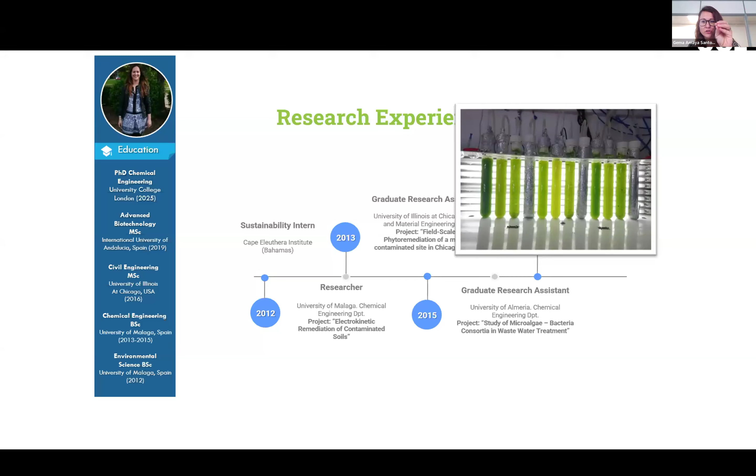All these different disciplines combined together led me to land on this amazing opportunity to do my PhD as a Marie Curie fellow in this project called Innoveox, that combined electrochemistry, wastewater treatment, sustainability, and life cycle assessment. Now I work as part of the Plastic Waste Innovation Hub.

The topic of my research has changed a little. It's still life cycle assessment, but now it's focused on plastic waste and how we can develop strategies from a systems perspective to reduce or make more sustainable the use of absorbent hygiene products: nappies, diapers, incontinence and period products. Those products are necessary, society needs them, but that doesn't mean they need to keep being a huge problem, a huge source of waste and a problem for the environment.

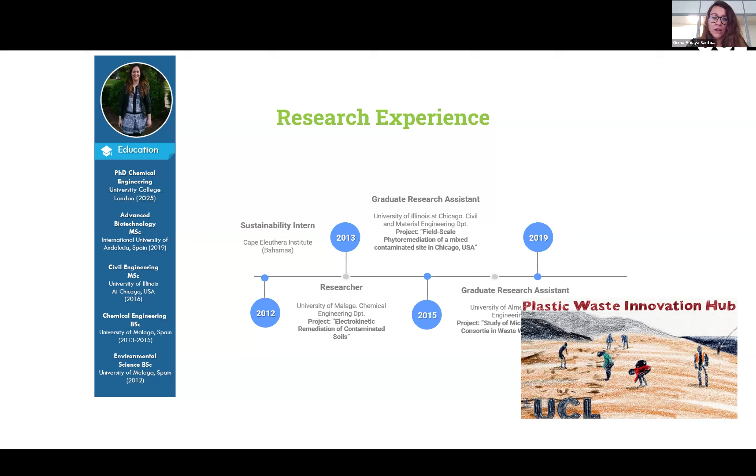So this is what we do now. I have divided this seminar into 4 sections following a logical order. Because of the time constraint and the broad audience, I'm not going to get into much detail in some aspects. So if you have questions, you're more than welcome to drop them in the chat or contact me later.

Be more than happy to answer if you have detailed questions about technical aspects. Basically, I'm going to talk about the background, why did I do what I did, a bit about the methodology. I will illustrate the study with some case studies that we ran through, and then we're going to talk about conclusions and next steps. So without further ado...

Not so long ago, European surface waters were found not to be at a very healthy status. They were okay, but they could do better, they weren't doing as good as expected. One of the main reasons for that was due to the presence of micropollutants.

For those of you who don't know what a micropollutant is, they are mostly organic compounds, many of them substances of concern and emerging organic pollutants that come from many different sources. They come from personal products like shampoo, body lotions and so on, medicines. They can be produced in different industries, coming from hospitals and so on. There is a very wide range of products that fall within this category.

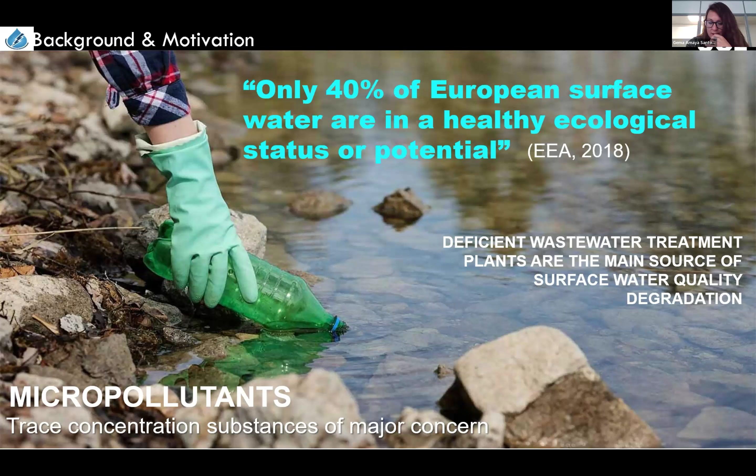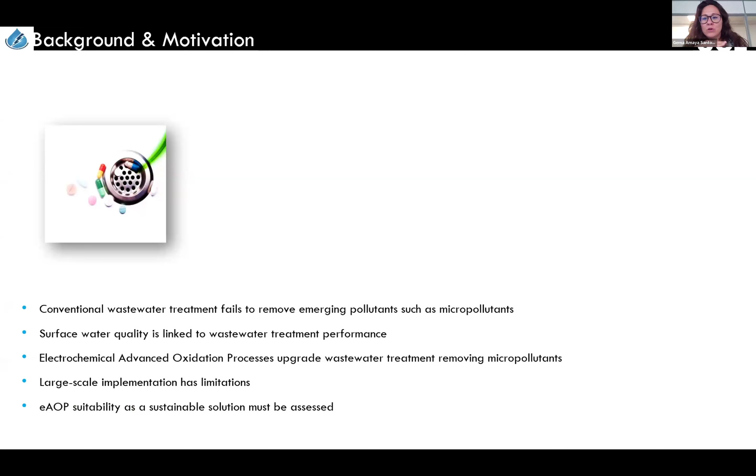If there was something to put the lens on, it would be conventional wastewater treatment plants, and I'll explain why. Basically, many contaminants end up in drains into the common wastewater stream towards the treatment plants. Conventional wastewater treatment plants often fail to treat them, so they end up in surface waters, causing damage to the environment and ultimately to human health.

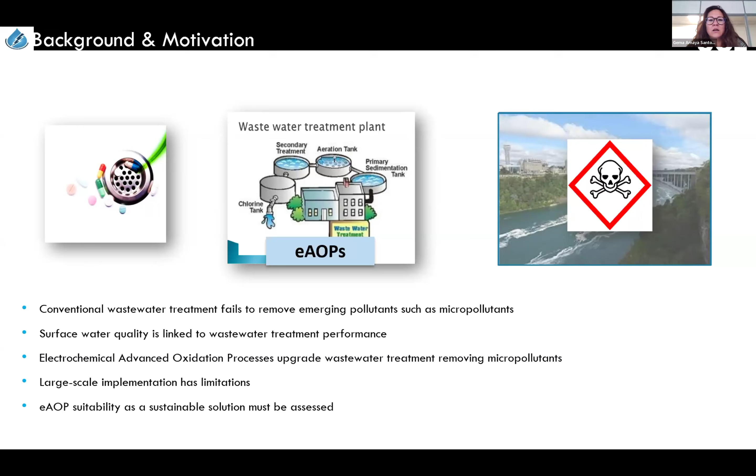So electrochemical advanced oxidation processes, or EAOP, were sought as a way to upgrade wastewater treatment and get rid, up to some point, of these chemicals. It's seen as a technology efficient to break them down and treat them through wastewater treatment. The problem is that large-scale implementation presents limitations because they are still at an early stage of deployment, so their sustainability and feasibility as a solution needs to be assessed.

For those who don't know what advanced oxidation processes or electrochemical advanced oxidation processes are, I'll explain quickly. Basically, they are a process able to break down organic molecules. How? It's a chemical process that produces highly reactive species with the ability to oxidize those organic molecules. The typical and most preferred reactive species is the hydroxyl radical, because it's very powerful. It destroys non-selectively - as long as it's organic or organometallic, it's done - and it reacts very quickly, creating a chain.

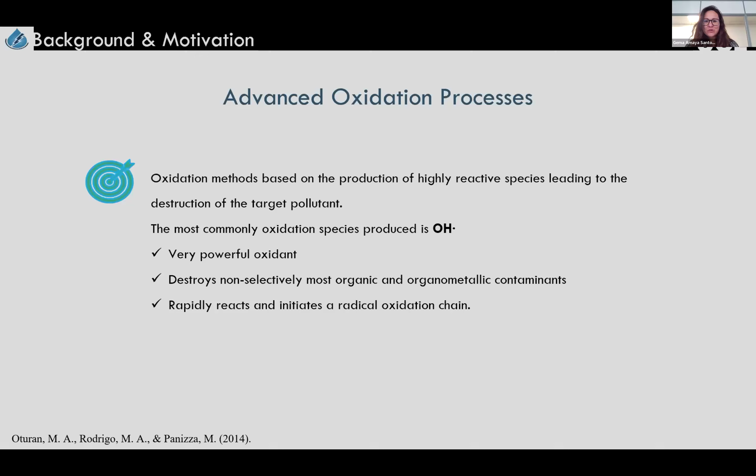I'm not going to get into detail on how to produce them. This is just to illustrate that there are many different routes to create those radicals - you can do it assisted by solar or UV radiation, or without. Typically you might need some reagents to create this chemical process to obtain your radicals.

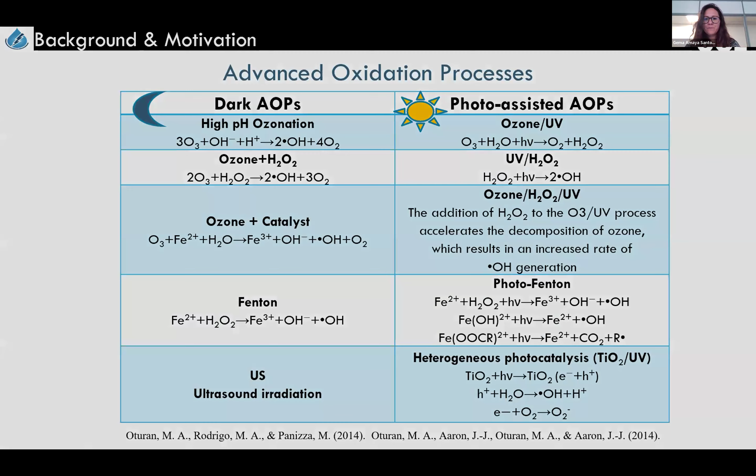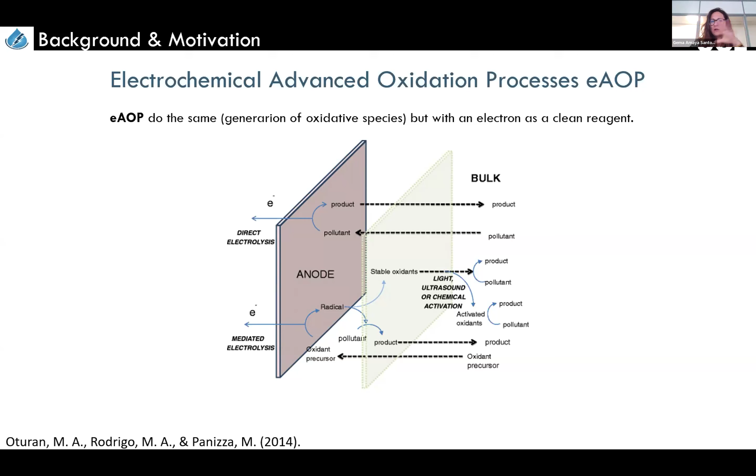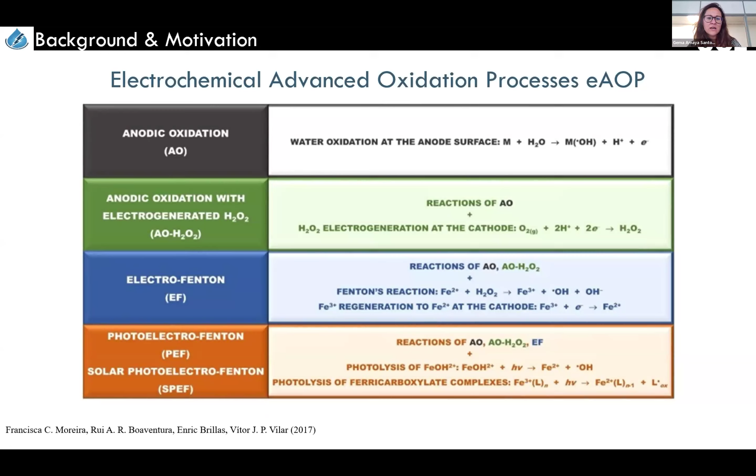However, electrochemical advanced oxidation processes do the same, but generate these oxidative species using electrons as a clean reagent. So in this case, you wouldn't need to add further reagents, technically. You would work with the setup of an electrolytic cell. There are also different rules and details about that I'm not going to get into - for those interested, you can talk to me later. As expected, there are different routes and technologies to produce those radicals: electrolytic oxidation, either anodic or anodic-cathodic, producing also hydrogen peroxide, electro-Fenton, some other photo-assisted processes, and so on.

Why are they so interesting? Well, they can operate at ambient conditions. They can potentially operate using renewable energy sources, and they are considered sustainable or cleaner because they wouldn't need further chemical addition, so they could be waste-free.

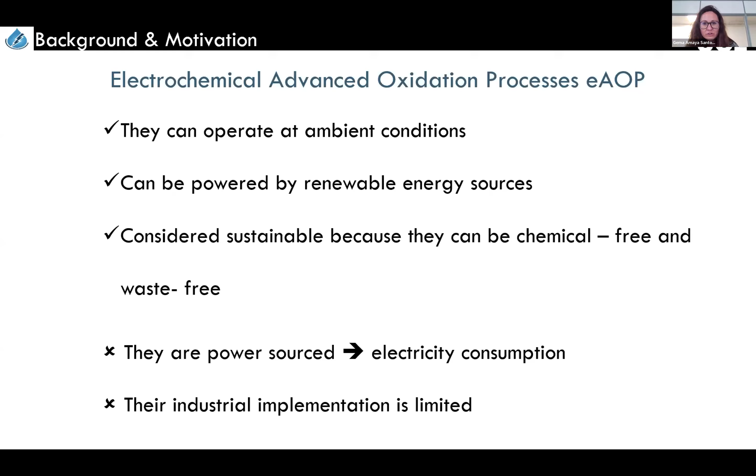What is the main issue with them? Well, they are power-source dependent - they need electricity for the whole system to work. So it needs to be upgraded, or very well researched, so it could be done in an efficient way to make it large scale. That's why, because of the costs associated with that, and because it's a novel technology, industrial implementation is still limited.

So we aim to solve that, to find a solution on how this could be implemented large scale, potentially as part of a conventional wastewater treatment. A group of organizations in Europe - companies and representatives of industry and academia - joined forces and created this European consortium called InnovEOX, funded by Horizon 2020. The aim was to develop electrochemical advanced oxidation processes that could overcome the obstacles found so far for large-scale implementation.

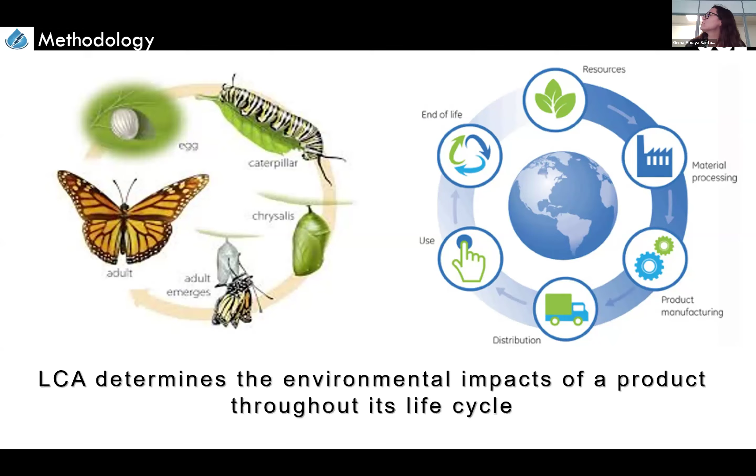All of that has an implication for the environmental impact, and this is what life cycle assessment allows us to do. It has a few steps you need to follow because it's standardized by the International Standard Organization, so you follow a recipe that leads you to the results you're looking for. First, you define what you're going to do, what the scope of your study will be, what it will include.

Then you have to recover as much information as you can about the process, everything that would have an implication for the environmental impact contribution. You have to talk to companies, do your research about the process, and find out how many materials, energy flows, water, and everything else you need.

Then you assess the impact, interpret it, and communicate it to your audience. It helps you not only have information about the environmental impact contribution of the process, but also communicate that to a broader audience. It can help you make decisions, and also compare between different processes or products.

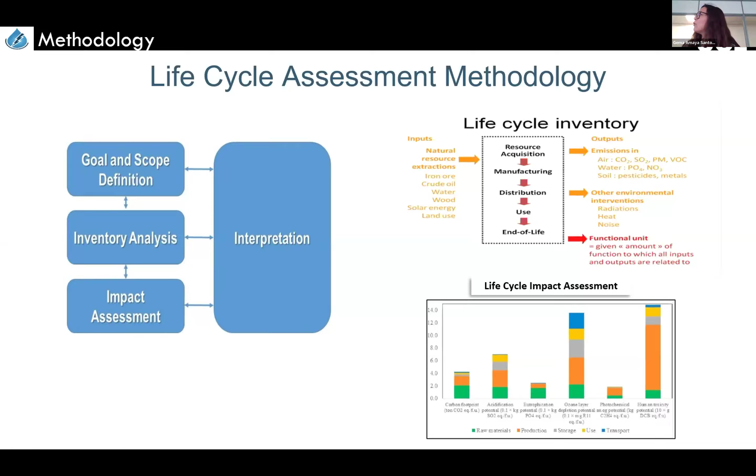In this life cycle inventory, you have an illustration of the information collection I mentioned that you need to have. For me, this is a very relevant part of the process, and also being able to obtain, interpret, and understand the results, because this is what makes the difference between making one decision or another. This is how your results eventually look.

So to create this framework: how can we assess the sustainability of electrochemical advanced oxidation applied to wastewater treatment that could be implemented at large scale? I have to ask myself some questions, like, of the technologies known and studied, which ones have large-scale potential? What limitations have been found for them not being implemented yet? And regarding life cycle assessment, what has been done so far? Has anybody done any study about this before?

For the first question, I found that electro-Fenton, electrooxidation, and photoelectrocatalytic oxidation were the most popular to have large-scale potential. They weren't tried yet, but they would potentially have some opportunity.

I also found that ozonation, which is not an electrochemical advanced oxidation process, was very well implemented—typically used in drinking water treatment as an upgrade to the treatment so it could be disinfected and safe for consumption. It also works for wastewater treatment and has been widely and successfully implemented at large scale. Because of this, it's a popular choice, and I used it as a baseline, a conventional technology, to compare to the innovative ones.

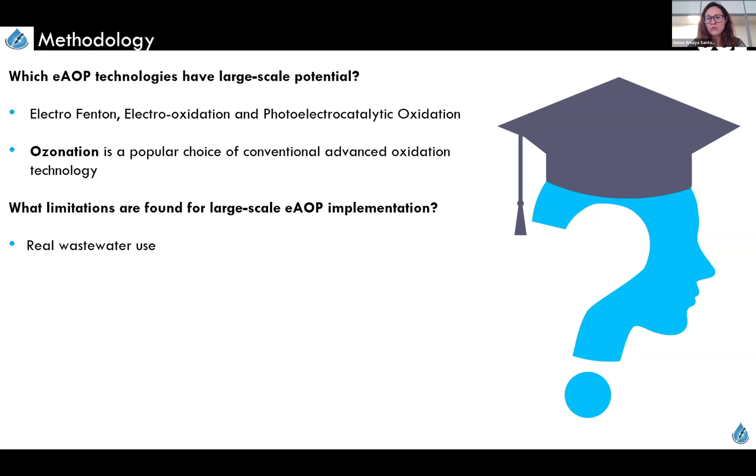About the limitations, basically the studies I found didn't use real wastewater for starters, because they are in a very early stage of deployment. They use synthetic wastewater, and when you use the real one, you have problems like mass transfer, fouling, and other issues that we'll have to deal with if we want this to be a large-scale, real thing. Energy consumption was pointed out as one of the bottleneck issues, and the associated costs, of course.

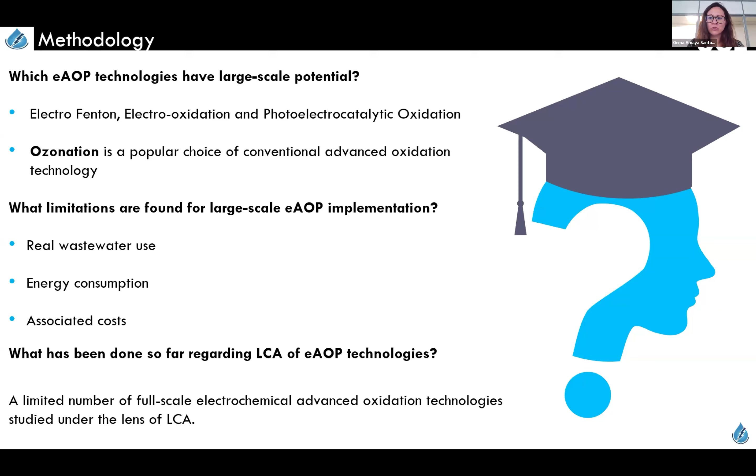Regarding life cycle assessment of these technologies, there weren't many studies when I did this literature review—very, very few, maybe two, were done at full scale, and not for urban wastewater treatment. Most of the studies were done at lab scale and were studies under the lens of LCA, but were not very complete.

For ozonation, what I found is that the key environmental impact was electricity consumption during the production of ozone, but those studies didn't have a cost analysis or a scenario analysis attached to it. Scenario analysis is useful because you can say, what if we use this material instead of that one? You run your LCA and see the result—that's why it helps you compare and make decisions. That's one of the cool things about LCA. Most of the studies didn't include that.

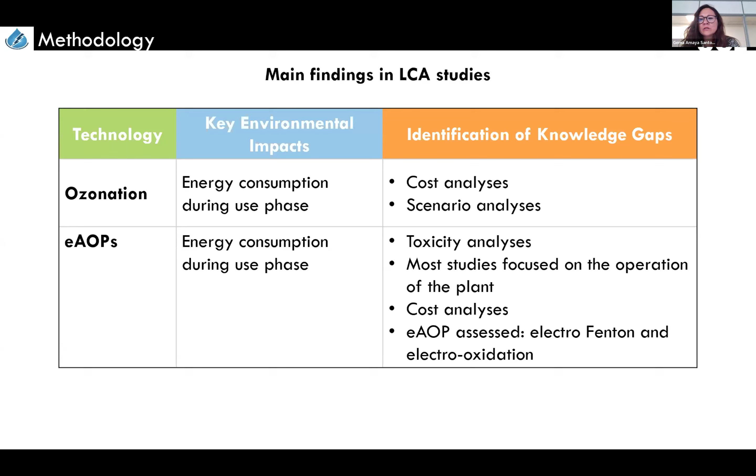And when it comes to electrochemical advanced oxidation processes, energy consumption during the use phase was pointed out as the main environmental impact contributor. But those studies didn't really consider the whole life cycle of the plant, like construction and end of life, and also didn't have cost analysis or toxicity analysis. The most popular technologies were electro-Fenton and electro-oxidation.

Okay, so I already had the information for my framework, and this is what I was going to do. I was going to assess the environmental and economic performance of electrochemical advanced oxidation processes for wastewater treatment, and study their potential for industrial implementation. I would use life cycle assessment to evaluate their sustainability, and then compare to ozonation.

I was going to focus on the technologies developed under the InnovEOX framework, because the aim of this consortium was to overcome limitations. So I focused on that, and then compared them to a very well implemented technology, ozonation, as the conventional baseline of the study.

So, step number one: develop a comprehensive life cycle assessment and life cycle cost of ozonation at large scale implementation. Then apply life cycle assessment and life cycle cost to the emerging technologies developed in InnovEOX and compare them to ozonation at different scales, not just lab scale, but also scaled up.

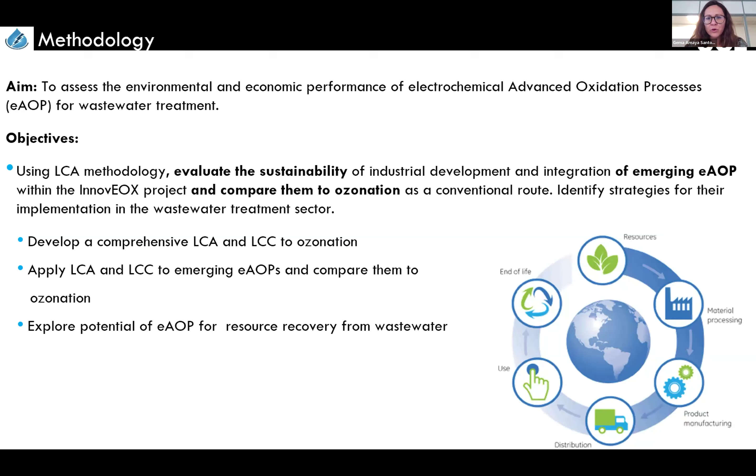And then I wanted to go a bit further and see what would happen if these electrochemical advanced oxidation processes in wastewater are not just used to clean the wastewater better, but also to recover some resources from the water. So we're going to see.

So to illustrate the research framework, I am using 4 different case studies that I carried out. The first one is the ozonation full scale analysis.

This was done in collaboration with the company Nijhuis Saur Industries in Netherlands. This was a very interesting case study because I got the chance to analyze, using life cycle assessment, the first ozonation plant built in the country, and it was going to be the first of many more. So my inputs, the outcomes of the study, would be useful for them to make better and more sustainable decisions.

In case study number 3, one of those technologies from case study number 2 that were developed at lab scale was theoretically scaled up and compared to ozonation full scale, using the ozonation from case study number 1.

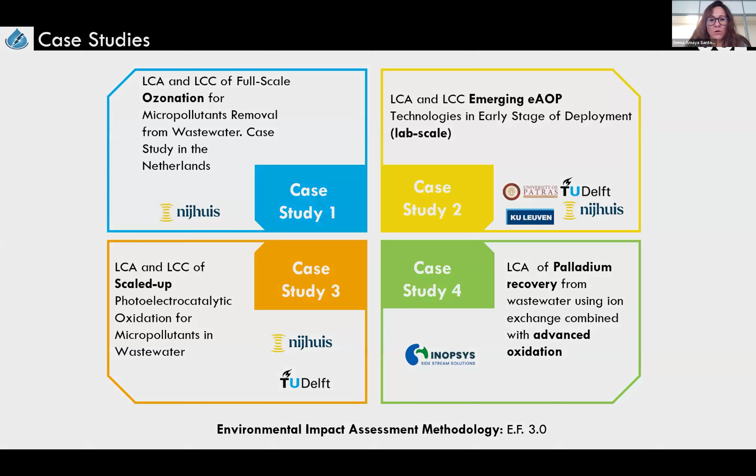Let's move on to the first case study. This case study has also already been published, so in case you have some interest, I can, or maybe the professor can, send you the link later.

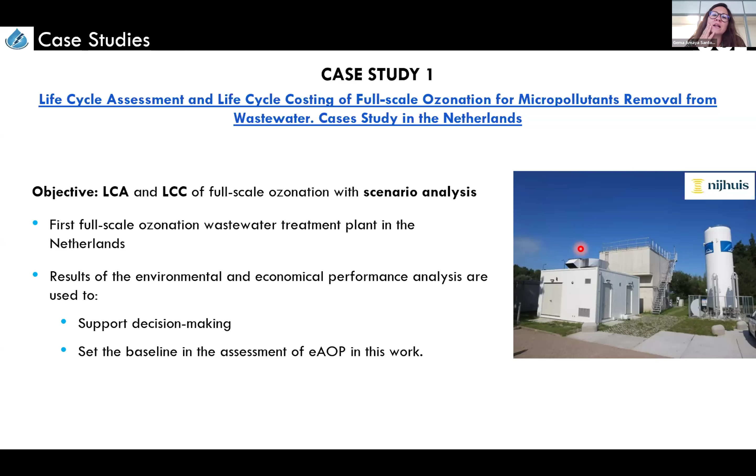In this case study, the picture shows the first ozonation plant for wastewater treatment installed in the Netherlands, built by this company. It was part of a government call for upgrading wastewater treatment, and as I mentioned, it was a pioneering process. So the outcomes of this study would support decision making, and it also set the baseline for my study, for further comparison with the electrochemical advanced oxidation processes.

Those are the system boundaries. The functional unit was the treatment of an effluent stream of 400 cubic meters per hour for the removal of 70% of micropollutants initially present in the wastewater stream.

So the effluent would enter the plant, pulled by inlet pumps. On one hand, we would have the generation of ozone using liquid oxygen provided from outside, not generated in the plant. In order to produce the ozone, we need compressed and dry air, supplied through PSA, and it is attached to a cooling system.

So then once the ozone is produced, it's injected into a reactor that receives the water and the ozone, and here the reaction of oxidation takes place. The unnecessary ozone gas goes safely into an ozone destructor that has a catalyst that destroys it, and the catalyst will be replaced and sent to disposal. And then we have the clean effluent.

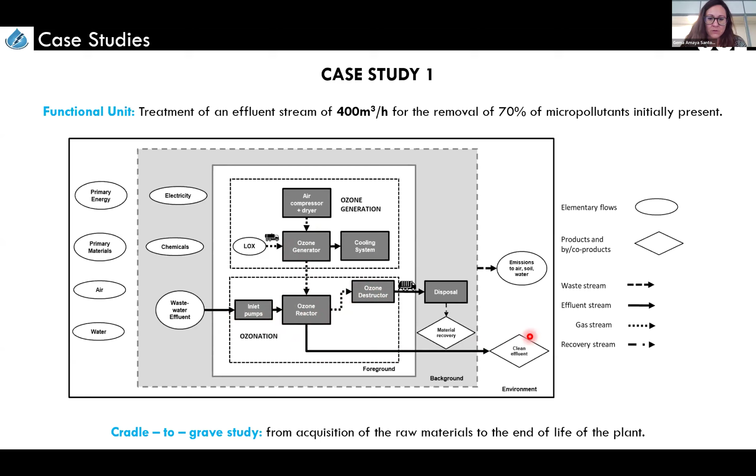The boundaries of the study were cradle to grave, meaning we assess all the life cycle stages of the plant from construction to end of life. End of life, also called closure of the plant, let's say.

So the central part of the study was the life cycle assessment and cost analysis of the process that was receiving the effluent, producing ozone, oxidizing it, having the clean effluent, and so on.

But then we also developed a scenario analysis. For each of the life cycle stages, we considered alternatives. For example, in the construction phase, what would happen if we use recycled or reused materials? How does it affect the environmental impact contribution?

In the use phase, what happens if we use green energy? And what happens if instead of providing the liquid oxygen from an outside company, we produce it on site? And for the end of life, instead of just disposing of the materials once the plant is decommissioned, what happens if we reuse some of them?

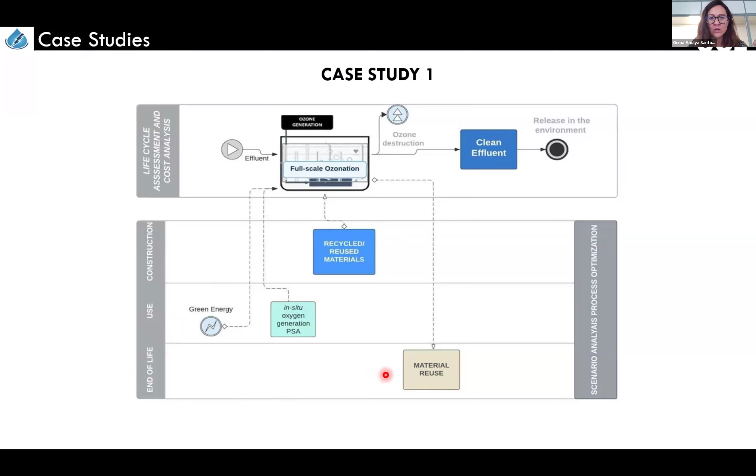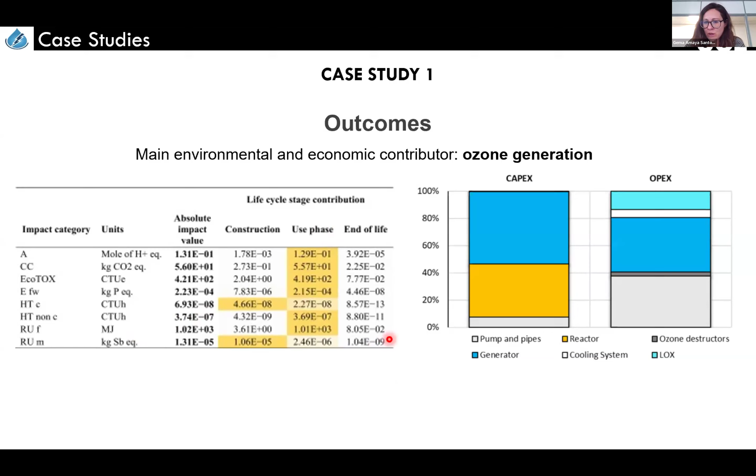So we ran our analysis, and without getting into much detail, we saw that for the plant as it was already running, the most important environmental and economic contributor to the impact was ozone generation, due mainly to electricity consumption. As you can see, the use phase represented the highest burden.

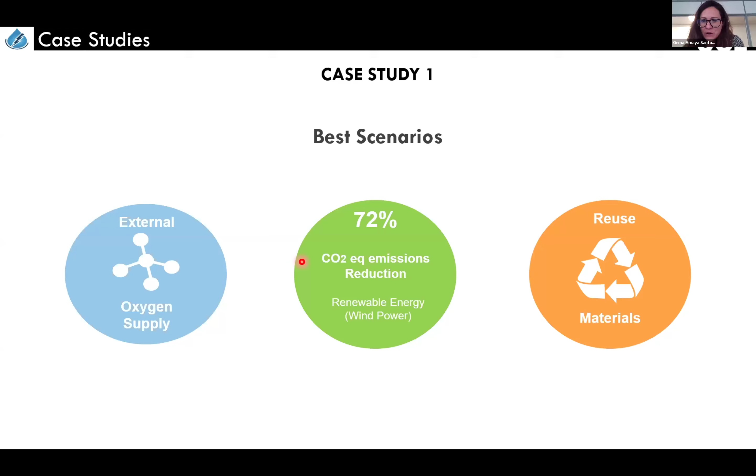When it comes to the scenarios, we saw that external oxygen supply was the best solution instead of producing on site. We can achieve a greater reduction of CO2 emissions when green energy is used, as the green energy we studied was wind power, sourced from the Netherlands to power the plant. Also, when we reuse materials, it provided the best outcomes for both construction and end of life. Those materials are mostly applied to the ozone generation setup rather than the structure the ozone generator was built in, or the reactor made of concrete, which was trickier to reuse.

Now, moving to case study number 2, this was the LCA and LCC of the technologies developed within InnovEOX at the lab scale. My colleagues were each working in their own universities and labs developing innovative electrochemical advanced oxidation processes.

Meanwhile, I was in the Netherlands in the lab, also running experiments with a lab-scale ozonator, ozone reactor. So what we did was put together our knowledge and results, and with the information they provided, I could run this life cycle assessment on my project, my reactor, and theirs, so we could have a fair comparison.

One of them was using a very low-cost cathode made of polyurethane sponge. This was a very efficient, low-cost electrochemical cell that he built in Greece.

This other colleague used more of a commercial lab-scale reactor for electrochemical oxidation, but she was focusing on the production of another radical, sulfate, instead of hydroxyl, which was the more popular one, to see what happened.

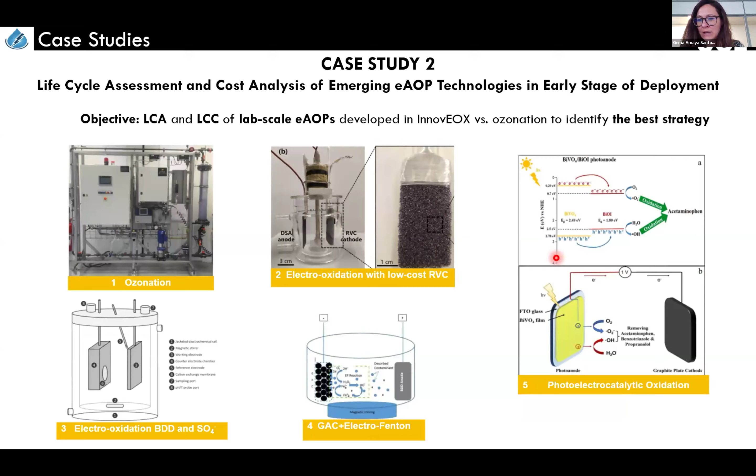So the shorter the lifespan of the reactor, the higher the environmental impact contribution and the higher the cost. That's why those promising reactors that were innovative in the sense of how they get their energy or the materials they use are very low cost and sustainable, didn't have such a great outcome. And the ones that were more robust and had a larger lifespan offset them.

But none of them could beat ozonation. Lab scale ozonation was the one that did better economically and environmentally. Again, probably because it's a very robust technology. And so, yeah, lessons learned.

So when it comes to scaling them up, we have to pay close attention to the material selection, check whether we can use green energy to supply the system, and also it's very interesting to track degradation compounds.

This I haven't spoken about much, and it was part of the scope of the project nonetheless. But when it comes to degrading emerging molecules with emerging technologies, you might come up with different degradation pathways that might not be as safe as they could be. You might end up with a byproduct that is even worse than the parent. So this needs to be carefully tracked down.

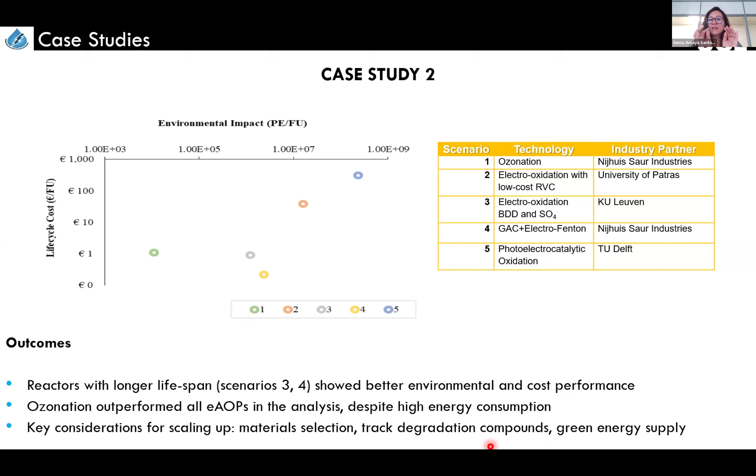So, bear in mind, for the case study number 3, we came up with one of the studies from case study number 2, lab scale. Surprisingly, not one of the ones that did better, but the one that had the greatest potential, also reflected in literature. So it was the one that would use solar power to power the whole system and degrade the micropollutant.

This was selected, and through computational fluid dynamics with a theoretical model, it was scaled up. And then I provided my knowledge and expertise to do the life cycle assessment and the life cycle cost of it.

We wanted to go a bit further, and we wanted to know what happened if it was implemented at real scale, like the ozonation, like this one that was already an actual reactor working right now to treat the water. So it was scaled up.

Some of the results were validated by experiments. So we ran the environmental performance analysis, the cost, and then compared it to what we obtained firstly in case study number 2.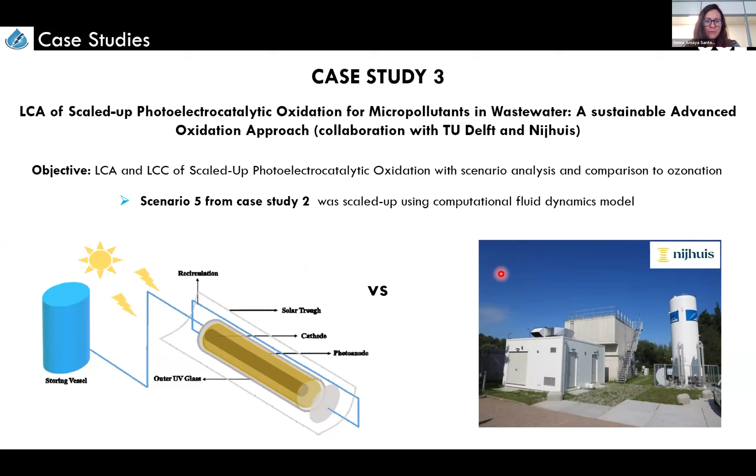And we were really pleased with the results, because this is just a short representation of the outcomes, but in most of the environmental impact categories that we considered, when we compared to ozonation, this photoelectrocatalysis worked way better than ozonation.

We compared our results with those models developed in literature, and it also did better. Our electrochemical advanced oxidation scaled up process works better than the ones that were available in literature.

And the main problem we found when this technology was to be implemented at large scale was electricity consumption. But surprisingly, we studied it powered by solar energy, but also powered by the grid, because we thought that would be the most sensible first step for implementation.

So even if it was powered by the grid, it wasn't the production of the hydroxyl radical and the oxidation process that was the burden. It was the power needed for the peripheral elements like the pumps that would make electricity consumption a big burden for this to be implemented at large scale. So if it could be perfected for the whole system to be powered by solar energy, that would be great.

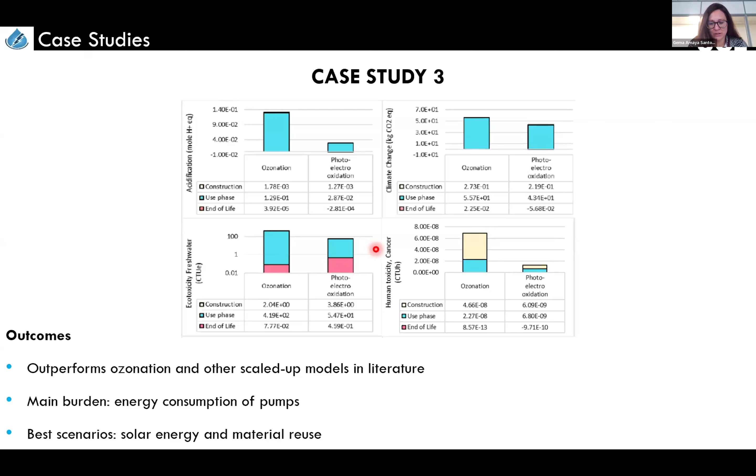Moving on to case study number 4, in this case we were not going to compare to ozonation. The scope was different. We wanted to see the environmental performance of recovering a very valuable resource such as palladium from wastewater using ion exchange combined with advanced oxidation. This project was done in collaboration with Inopsys, a startup company in Belgium, and we wanted to see the performance with different optimization scenarios compared to incineration.

So what has been done so far, here's how it goes. There is this pharmaceutical company whose waste stream includes an effluent that contains palladium. So far, what they did was collect this wastewater effluent and send it to an incinerator without recovering anything. Inopsys came along and developed a technology that would be able to recover this palladium from the wastewater using ion exchange. First of all, we wanted to see whether this alternative was better than just incinerating the wastewater.

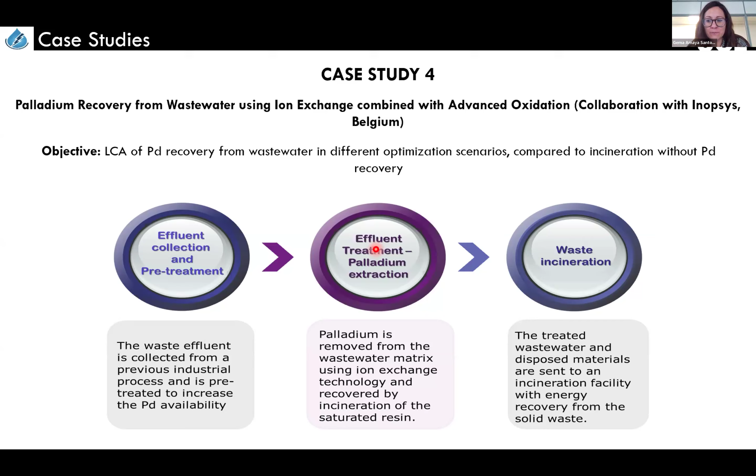The way it would work: they would collect the effluent from the company and run some pretreatment so that it would be easier for the palladium to be extracted, making it more available. Then the extraction process would happen using ion exchange resins. Once the whole effluent has passed through the ion exchange column, you have clean wastewater on one hand, and your resin with the palladium on the other. You would send that to incineration and recover the palladium downstream. So this is an overview of the process.

And then we have the different scenarios. So for you to have an idea, what's shown on the top is what was happening before. The baseline was taking the wastewater, incinerating it, that's it. But then we came up with the Inopsys strategy, which was first running a pre-treatment: removing total solids, suspended solids, and reducing the pH. Then we have different optimization scenarios.

Scenario A is the one that was actually implemented, the one they developed first. In this case, you don't have any advanced oxidation process. You just run the water through the column, trap the palladium, and then you have two alternatives. Either you send treated water to incineration -- because although I mentioned this was a clean effluent, it wasn't; it had other compounds that need to be gotten rid of by incineration -- so you send the wastewater without the palladium to an incineration plant.

That's it. Or, because of the pre-treatment that has to run, you end up with a wastewater that has not just palladium but also potassium. In this case, you don't recover anything but the palladium. But in another case, you do -- you have your palladium recovered in the resins and potassium in the wastewater. So the alternative was: what happens if we recover that potassium as well, and then get rid of the water?

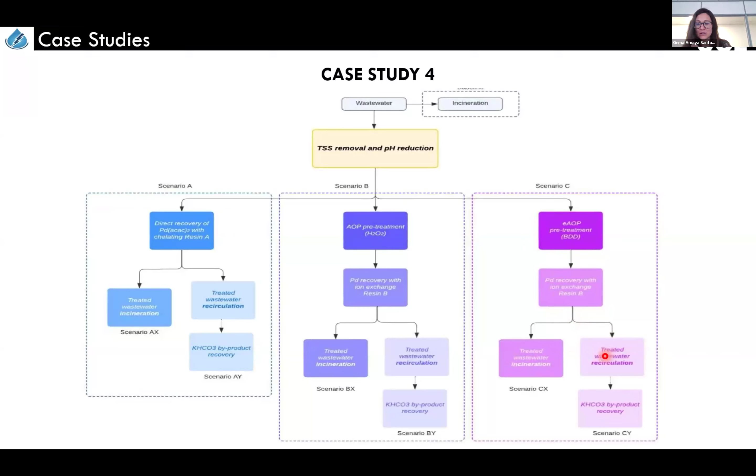Those are the system boundaries. The functional unit of this case study was the treatment of 100 cubic meters of wastewater for the recovery of palladium. In this case, the system boundaries only included the use phase -- from when the water leaves the company until it is disposed of after recovery.

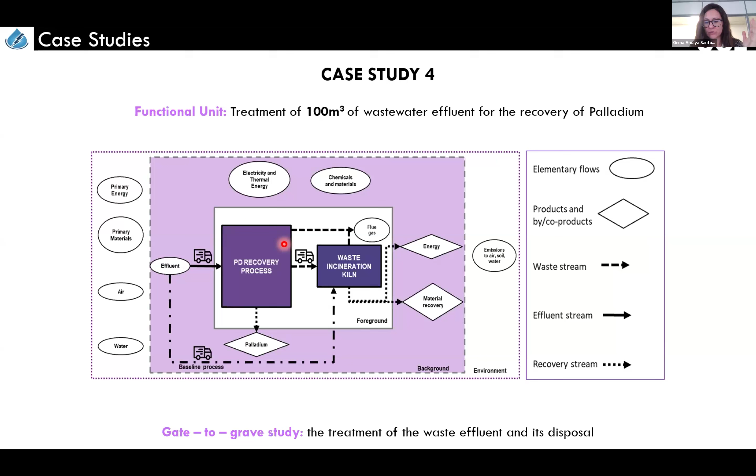I'm not going to get into much detail or overload you with data analysis, but I just want you to have a look at the chart. The first column, baseline, is what was happening before we implemented this treatment. As you can see, this follows a logical color coding system where red is bad and green is good -- the greener the better, and the darker the red, the worse. So in this case, the baseline scenario had the worst environmental performance.

Recovery of palladium, whatever alternative you would choose, would offset what was being done before. And that is because palladium has great value, not just economic but also environmental -- the extraction treatment and so on is very impactful.

So if you recover it, it would be great. So scenario A, AX and AY, was the one without advanced oxidation pre-treatment, and the Y implicates that you recover potassium, so it performs better. When you do the advanced oxidation pre-treatment and recover the potassium, it's even better. And if you apply electrochemical advanced oxidation and then recover the potassium, it's great as well.

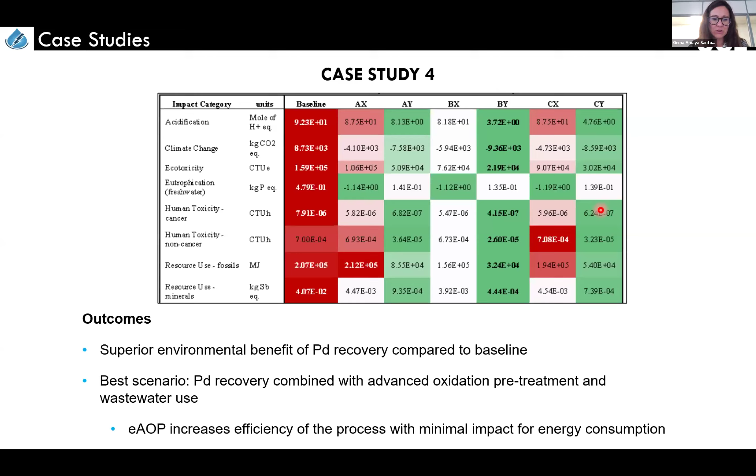There wasn't much difference between electrochemical and advanced oxidation when it comes to environmental performance. Advanced oxidation was better than electrochemical, but electrochemical advanced oxidation pretreatment would enhance the process, so it would be a very great alternative. Recovering palladium was better, even better if you recover potassium, and electrochemical advanced oxidation is something to be taken into account, but of course needs to be backed up with some more experiments.

Regarding the objectives we had in the beginning, we wanted to see if the implementation would be feasible. We wanted to compare the environmental and economic performance with ozonation. We did it in case study number 1. Electricity consumption was the main impact, and our outcomes were very useful for future implementations.

Then we evaluated the sustainability of those emerging technologies within the Innoveox consortium, and we wanted to see their potential to be implemented in wastewater. We compared them to a very well implemented technology, which is ozonation. We did that in case studies number 2, lab scale, and 3, large scale or industrial scale. We saw that at lab scale, the impact is dominated by the lifespan and robustness of the technology. When you scale it up, the technology we selected outperformed not just ozonation but other technologies as well, which makes it very interesting to further research.

Then, when we explored the potential of electrochemical advanced oxidation for recovering resources from wastewater, we did that in case study number 4. We saw that integrating electrochemical advanced oxidation into the process would increase the efficiency and report a minor impact, despite an increase in energy consumption.

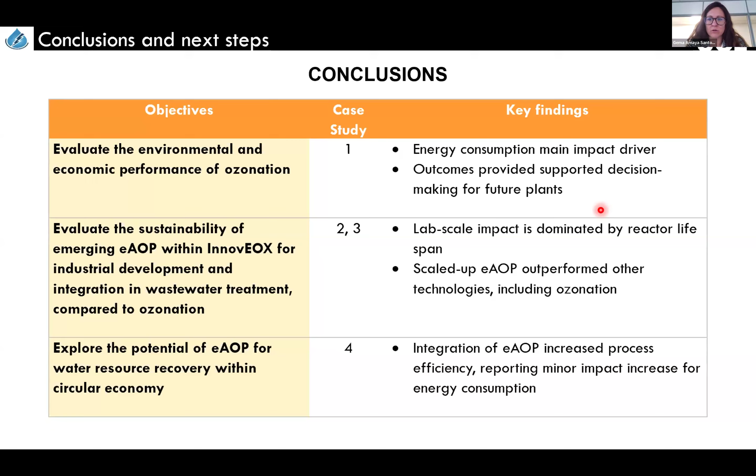But we also found some limitations, not just great outcomes. For example, there is a lack of information on the transformation products for toxicity assessment. It all comes down to getting rid of micropollutants. We don't want micropollutants because they can be toxic, harmful to the environment, and affect our health, so we should not forget about that.

So anything that involves degrading these compounds needs to be tracked and assessed, especially their toxicity. Sometimes this is not very easy when it comes to integrating toxicity analysis into life cycle assessment. There must be some agreement on that, and more work done, because since they are substances of emerging concern, some of them cannot be included in the life cycle assessment due to a lack of characterization factors. So we need to expand the understanding of these contaminants and their behavior in water.

Another limitation we found is that the commercial scale technologies we assessed in case studies 3 and 4 were theoretical. It is true that in case study 4, one of them has already been implemented, but by the time we were doing our life cycle assessment, it was still in a theoretical stage. So we need validation from pilot scale experimental tests, and that is crucial if we want to prove that they actually have the potential to be implemented at large scale.